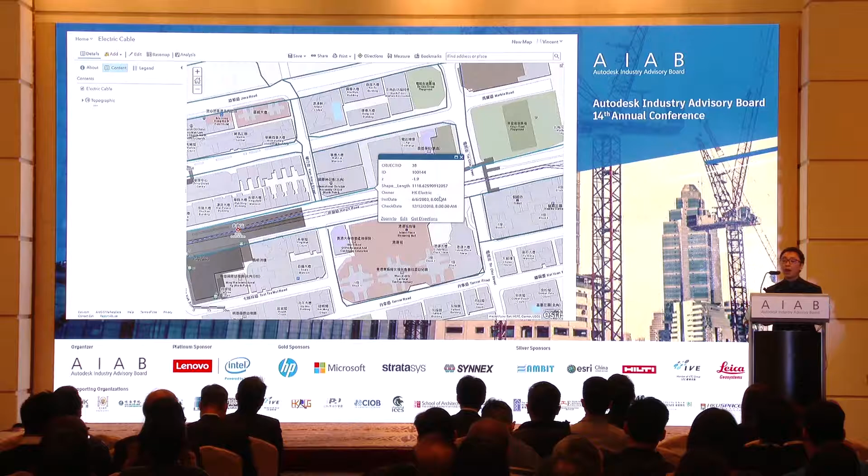So it is very simple GIS operations. It's very easy for all the GIS people, but now not just on the GIS platform. This platform can also be the content provider to your BIM environment. Now, I would like to pass the time to Waiky to demonstrate how to use the BIM environment and access the GIS data for doing their own job.

Okay, thank you, Michael. So our workflow will be like this. We will have everything connected to InfraWorks. We will have the terrain data and aerial photo put into InfraWorks, and then from InfraWorks, we connect to ArcGIS directly to get the underground pipe data, the water area data, the building footprint data, and the subway station data, all put into InfraWorks.

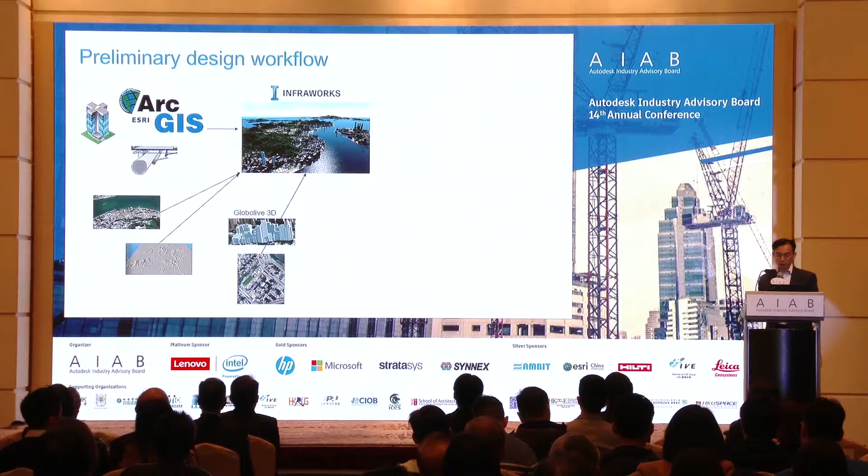And we also make use of some satellite images, and then through an Esri partner called Globolive 3D, an Indian company, we will import some of their buildings into InfraWorks too. And then we will put our ready-made Revit model into InfraWorks. Suppose we make a school on a hillside; we will do the site formation, make a new road and bridge to the school, and because of the road, we will do some road traffic analysis, and then generate a video for public consultation.

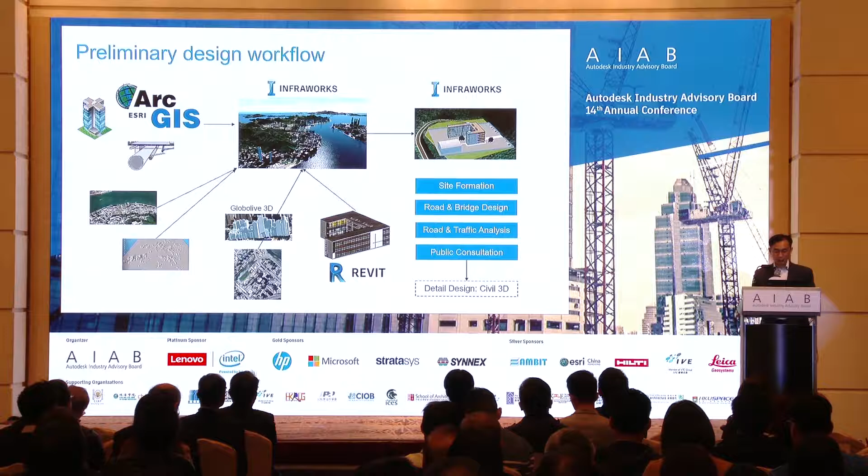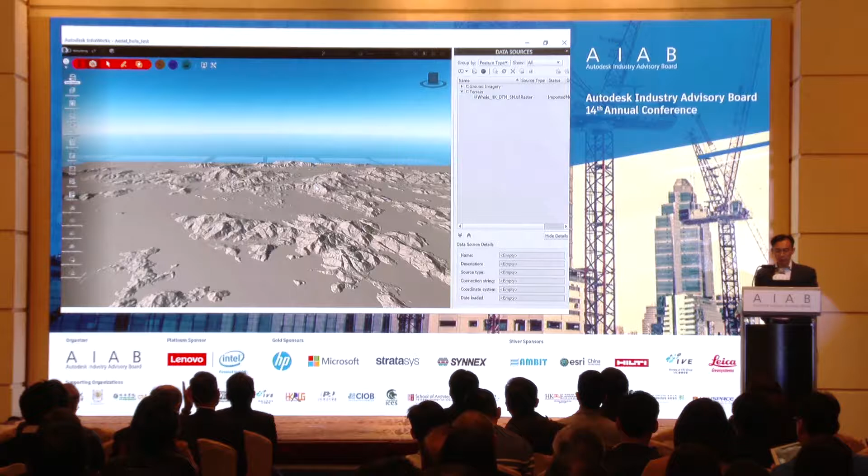And then you can also go through Civil 3D to do detail design on your road or your slope, and then I will pass to Michael again to do the GIS analysis. Okay, so here's the quick demonstration. First of all, we have the InfraWorks environment, we load in the terrain data, and we also load in the aerial photo, and basically you have the whole Hong Kong model in InfraWorks. What we lack is the building, the sea, and the underground data.

So we click an Esri button in InfraWorks, and we have the same location as your InfraWorks model, and then we check in Michael's ready data: the building footprint, underground data, subway station, etc., the water level, and then you have the whole Hong Kong model. And it just runs on a PC with 32 gigabytes of memory. So let's see the model.

So here's the integrated model with the underground water pipe, part of a subway station, and then you have all the buildings there, okay? And the overall whole Hong Kong. Of course, you can also make use of the 3D spatial data from the Lands Department to make this model more beautiful, okay?

So here we pick a site to build our school. We pick a hillside close to the Quarry Bay area. And then we need to do a site formation. So we just pick an area and select the hillside area where we want to build the school. And then we need to make the platform, so we adjust the elevation of the four corners of this coverage.

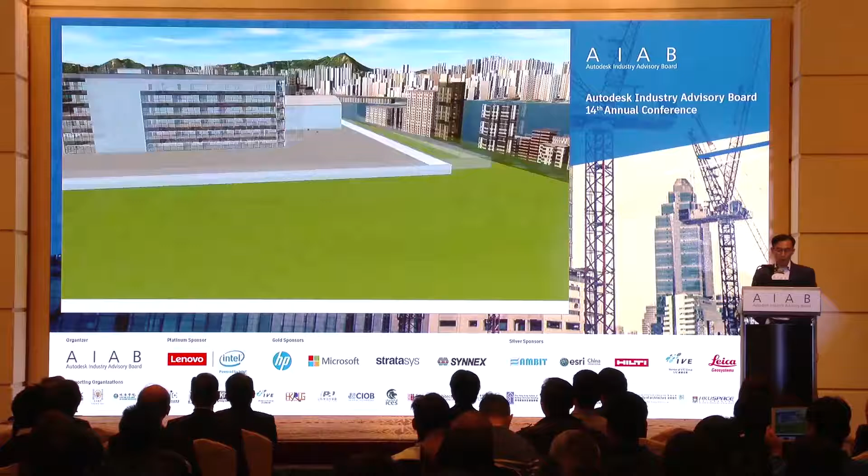Okay, and here you can go through it, and it has some furniture, car parks, everything is already ready. Okay. So we need to build the access road to the site, connecting to the nearby roads. So we build this road and then adjust the elevation. What you see is what you get. Or you can also turn on the profile view to make the road less steep there.

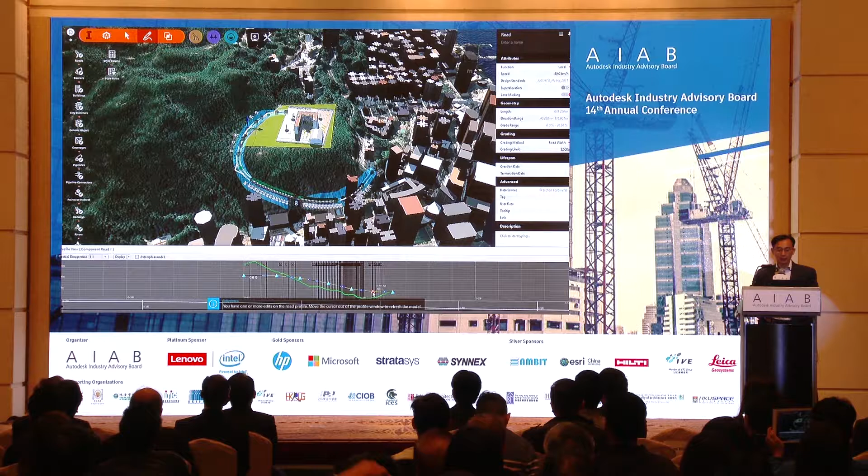Okay. And then I can save this as one of the proposals. And if I don't like the road, I can change part of the road into a bridge, and then you can see the girder there, and also you can adjust the piers and check the space envelope under the bridge. All this can be done by InfraWorks very easily.

And then I can check the cross section of the road, check the super elevation, and also I can check the cut and fill of each cross section to understand our design.

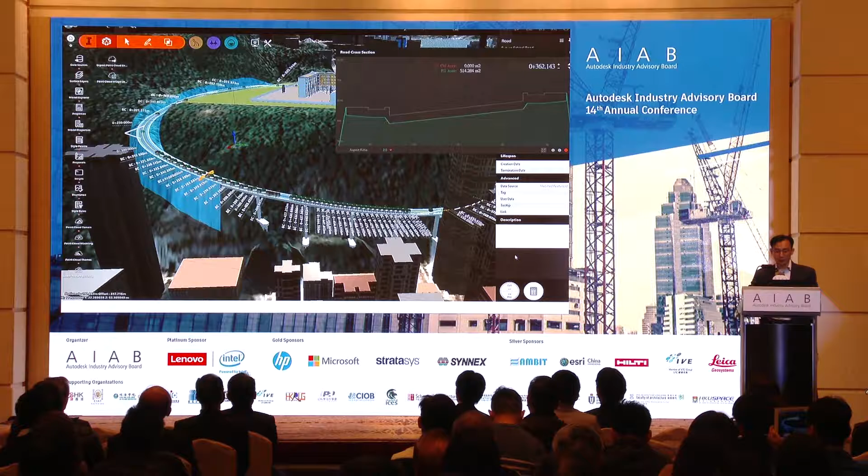Because I have saved the proposal, I can switch to different proposals. I can switch back to our road design without the bridge, or continue with our design on the bridge proposal. And then we can do the sight distance analysis to see whether, when the driver drives on the road, there's any obstacle blocking the eyesight of the driver, to see any potential dangers to the drivers.

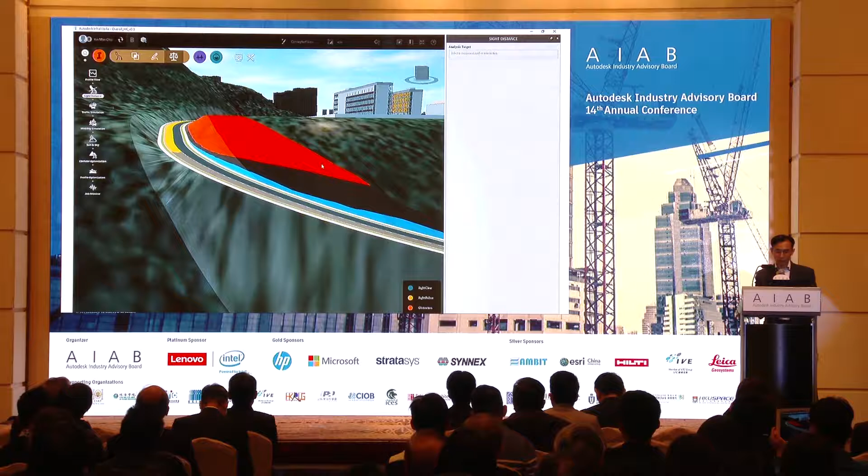And then we can also do the traffic or mobility simulations. You can have the pedestrian, the adult, the child proportion. You can input different kinds of cars, you can specify, and also the traffic data. You can input it based on the assumption, and then you can have the traffic simulation on the site.

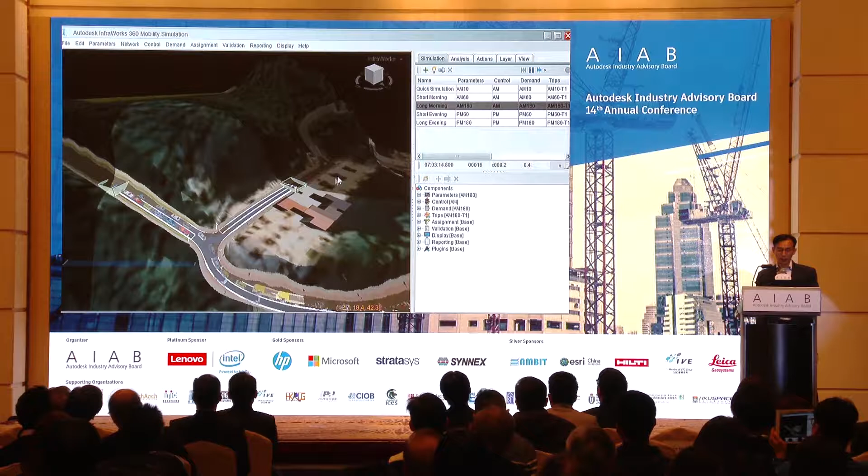And you see in the morning the parents picking up the kids for school, so we have a bit of traffic jam on the road to the school. So we may need to do something here, okay?

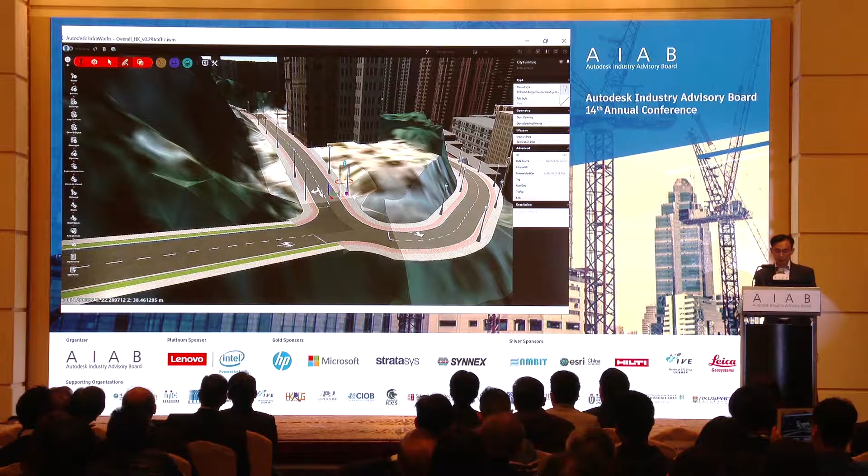And then while we are designing, suppose some surveyor or some people go to the site to verify the data. He can use the Esri data collector to collect, for example, this lamp post's data, its position or its serial number, etc., anything.

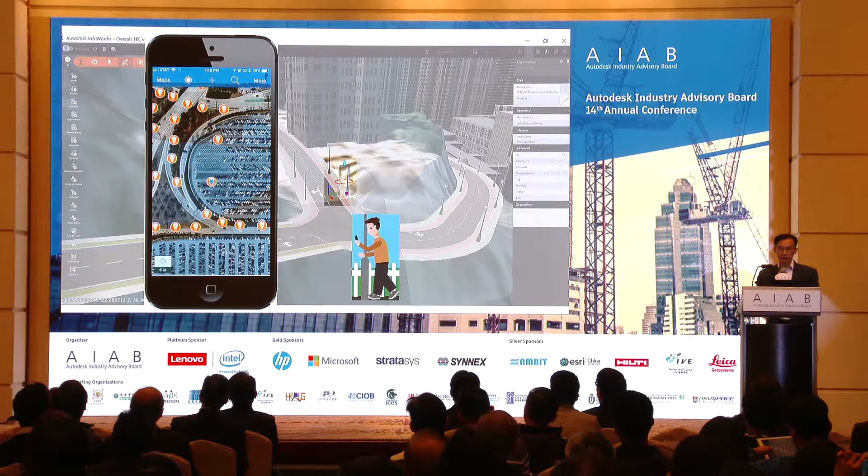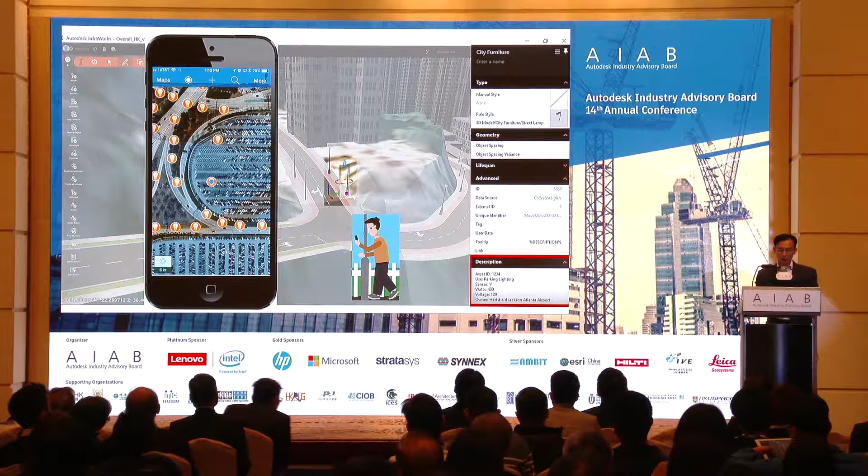And then through this data collector, the information will be instantly transferred to the ArcGIS database. What we can do is, using InfraWorks, just press a synchronize button, and all the information can be synchronized to InfraWorks, so that the engineer, while he's designing everything, can get the most updated information. All the information is real-time updated, and then he can do the best design for us.

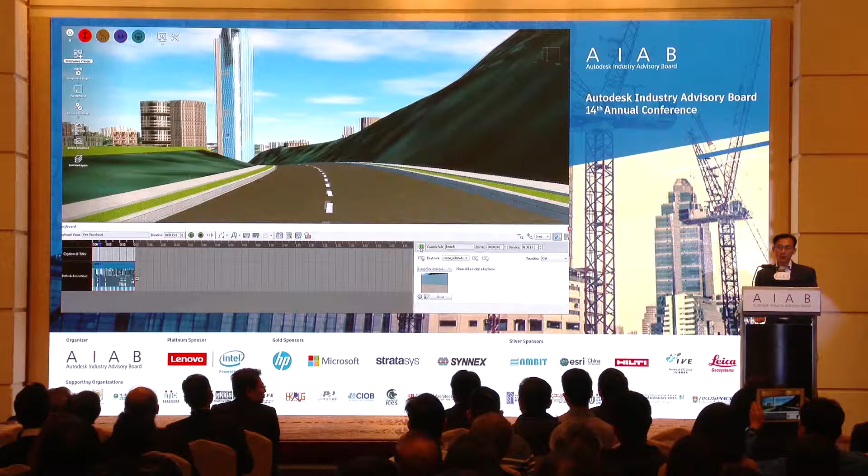On the website or on your phone. Okay, and you can do some teleporting.

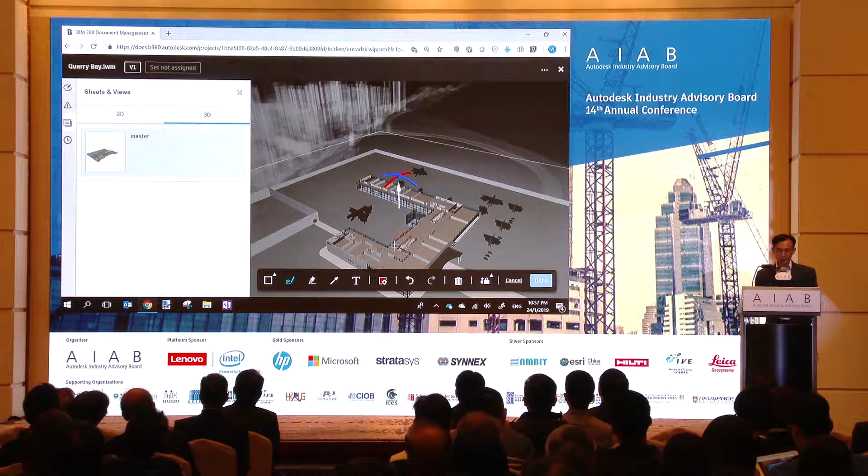And then I can do some markup there.

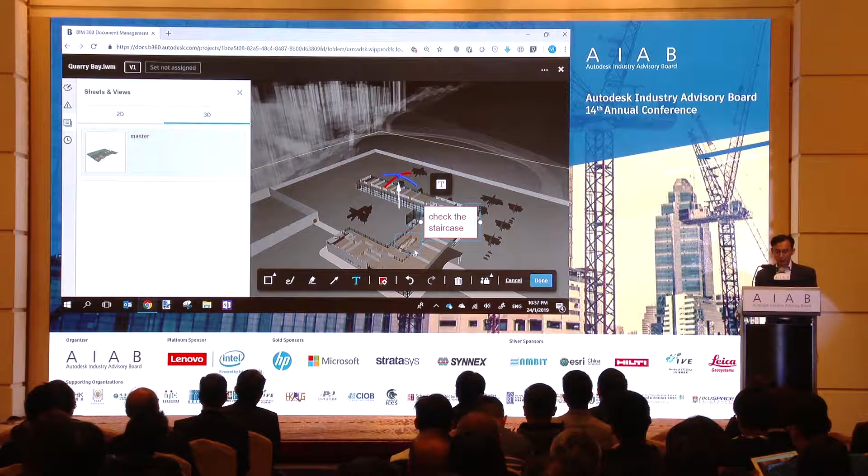And I can also review all the markup I have. There are two markups showing up here. That one is what I marked up last night.

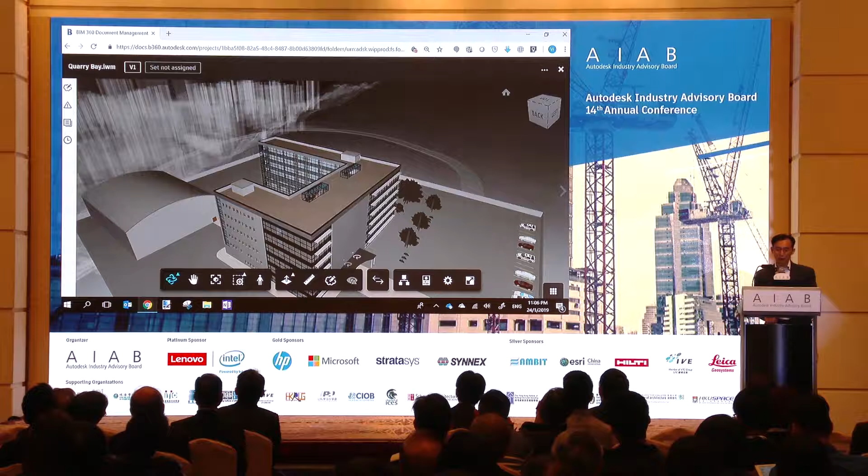And then you can also do some measurement on the model on your phone. Or you can also create an issue for somebody to follow up on the thing. So you will have a lot of workflow on BIM 360.

And after that, suppose we have finished all our design of the school and the site, then I will pass to Michael to do the GIS analysis. Thank you, Michael.

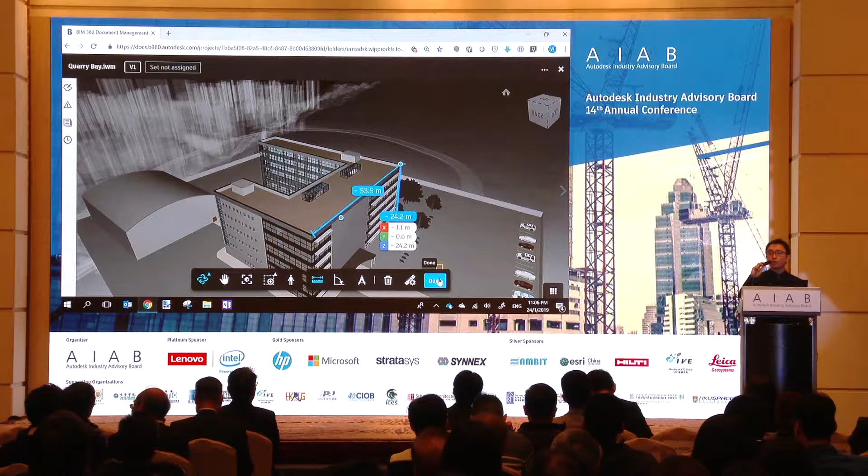Now we go back to see how in ArcGIS we can easily subscribe back to the BIM data provided by Revit. So here is the ArcGIS desktop environment, ArcGIS Pro. Similar to what you see in InfraWorks, we can also integrate different types of spatial 3D data together in a single scene.

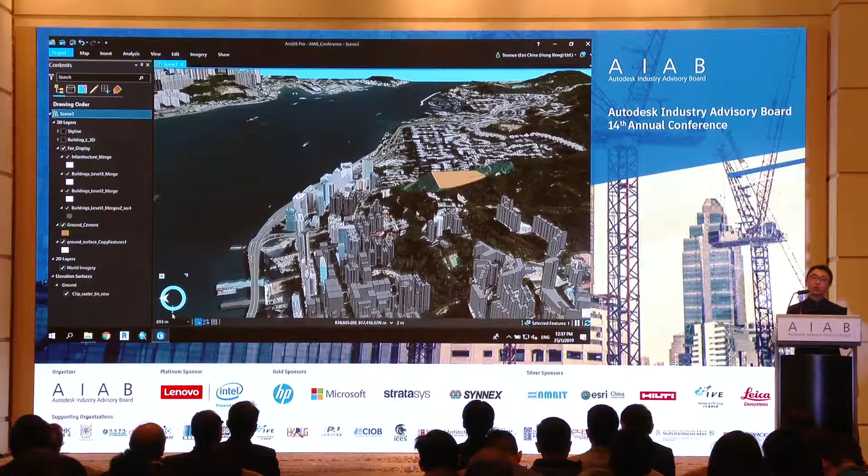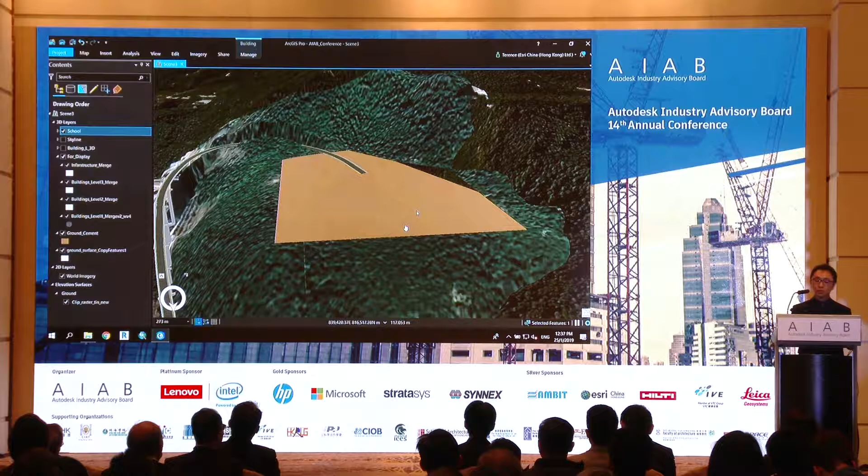What I need to do is directly add the Revit model to ArcGIS Pro. In the past, we needed to go through a conversion process to convert the Revit to GIS data, but now we can simply directly access the Revit model in ArcGIS Pro.

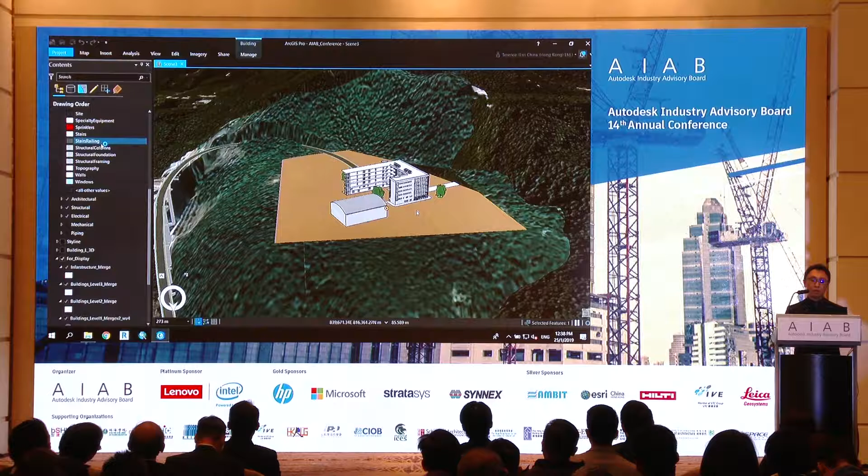Once we add the model, the hierarchies are maintained, like architectural, structural, electrical, mechanical - all the hierarchy in Revit is preserved. You can see how quick and easy it is to put a Revit model in the ArcGIS environment.

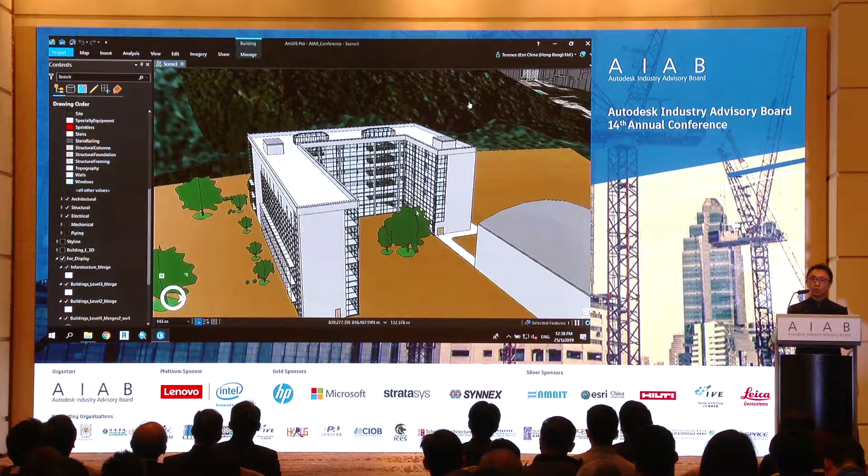Not just the spatial things, but also the corresponding attributes are preserved. You can simply click on it and retrieve all the corresponding attribute data.

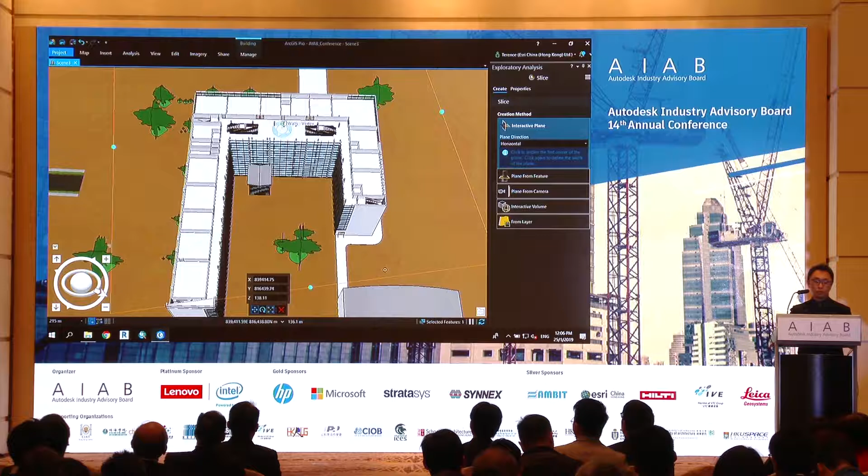Not just viewing the geometry, we can do more on top of it. We can use the slice bar to see the details in different floors. This operation is quite similar to what you did in Infraworks - we also provide a similar thing for you in the GIS environment to conduct that slicing operation.

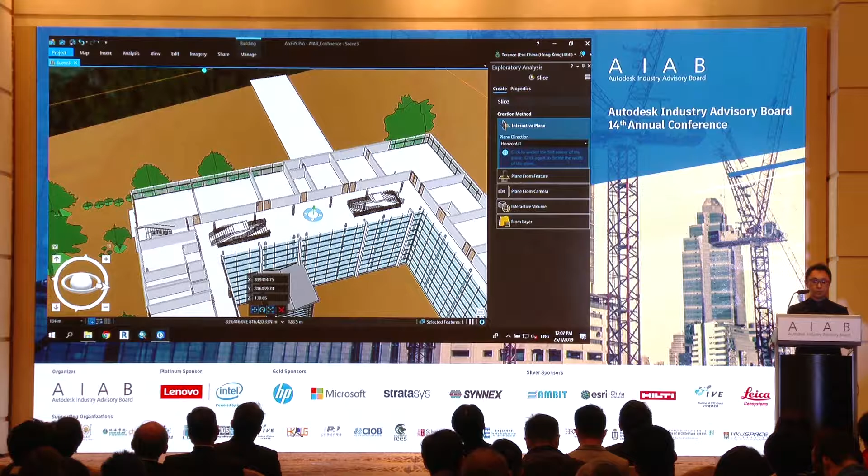So you can see in different perspectives, and then assign the same slicing tools to see the details accessed in individual floors.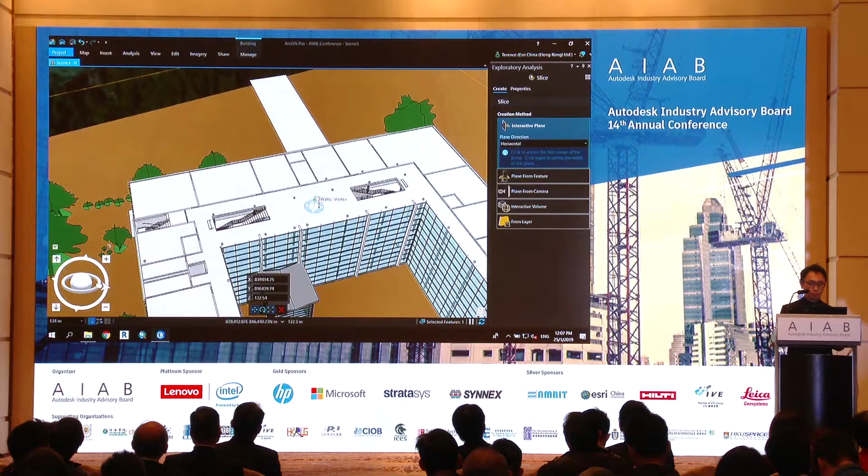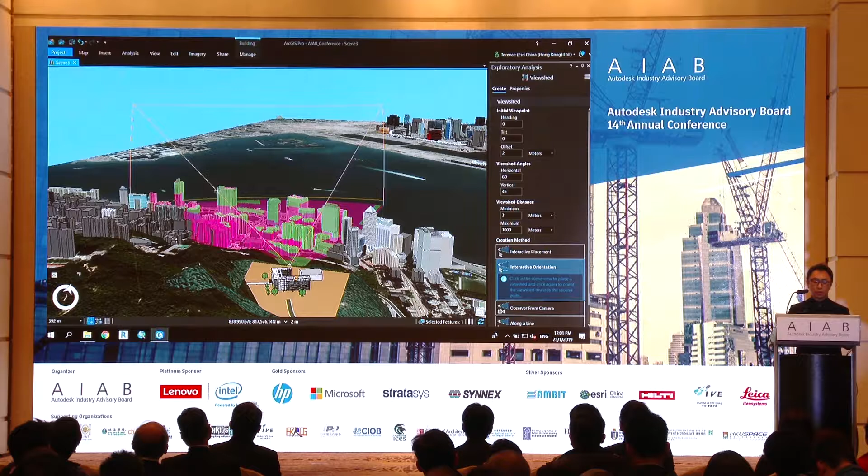Now we are going to do some analysis. For example, I would like to understand the visibility from the proposed school, so I just do some interactive viewshed analysis. Just click on the rooftop and point outside, and I will get an idea what buildings are visible from the school, and which scene will be blocked by existing buildings.

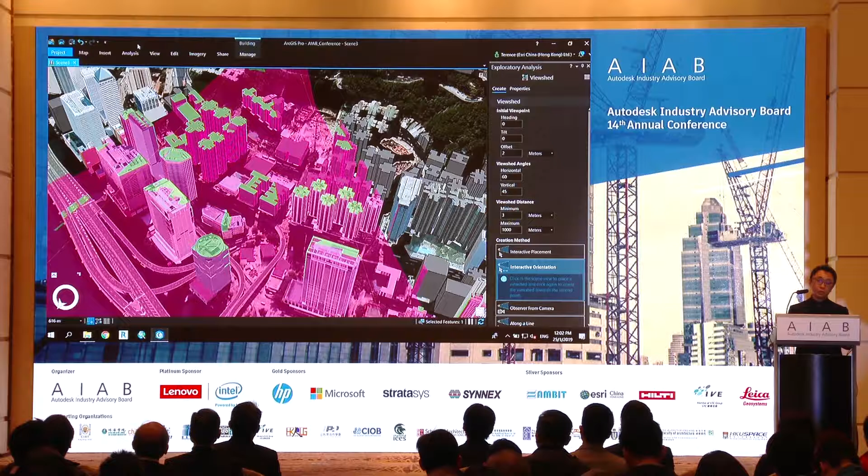So those red areas are invisible, and those green areas are visible.

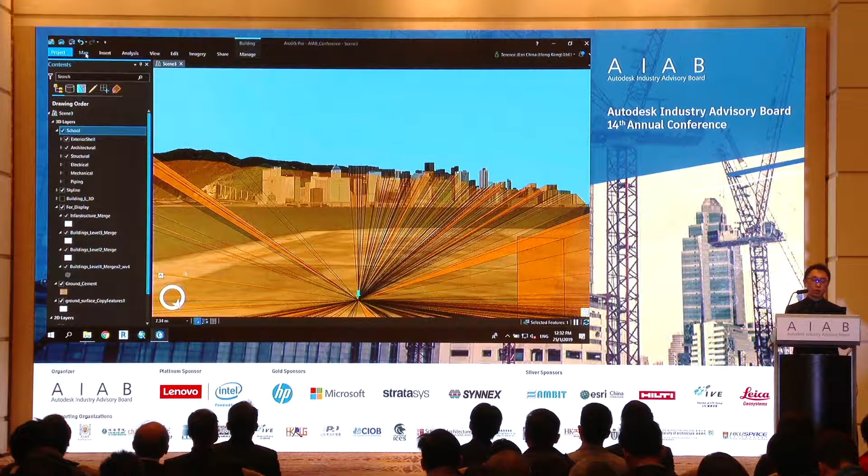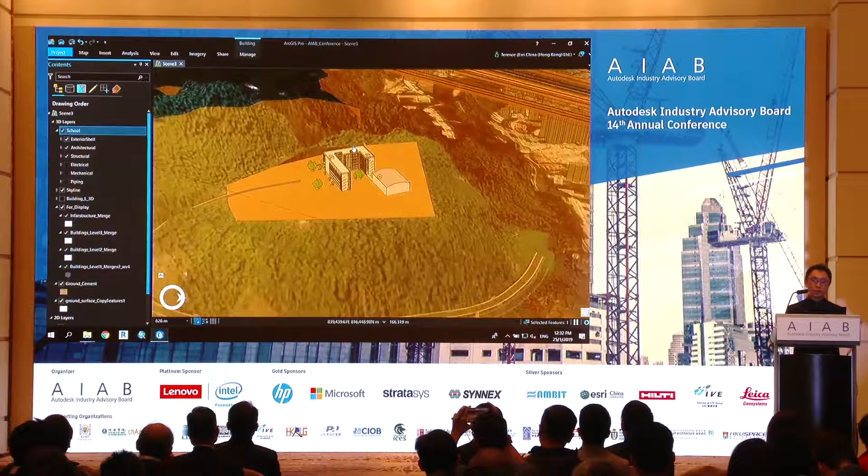Now I would like to do a skyline analysis, because when we're building something new we need to ensure that it doesn't exceed the ridge line. So I put the observer points on the Kai Tak area and then do a skyline analysis. You can see, obviously, the proposed school's height is still below the restricted ridge line, so this is a good proposal.

Not just putting all things in a single GIS dataset - once we finish everything, we can share it, because we would like to enhance collaboration. So simply click on the button and type in the name, and the whole 3D scene can be published to your cloud ArcGIS Online or your private portal.

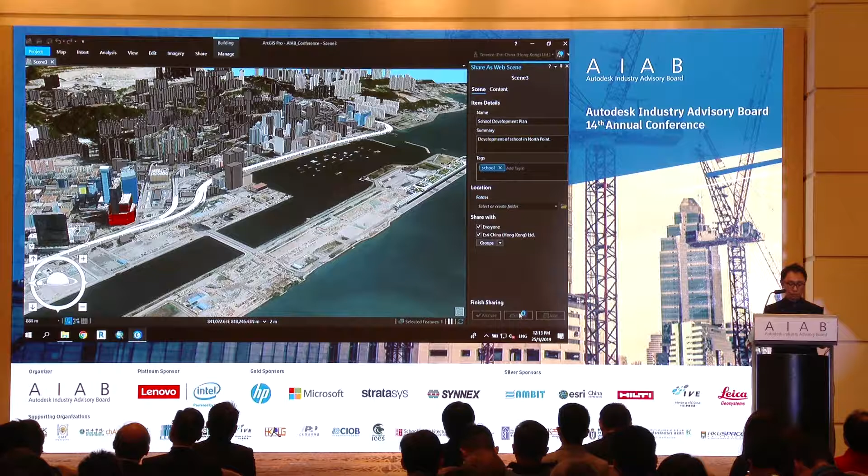Now we go back to the portal, just like in the initial stage, but now we have a 3D model being shared. Simply click on it, and in the web browser, you can view the whole city in 3D.

Now we just keep flying through the city and view it in different perspectives. Let's go to the Kai Tak area, the location where we did the ridgeline analysis on the desktop side. You can see the cruise terminal and all the nice buildings.

Then we can go to the location of the proposed school. Again, the Revit files can be directly published in cloud solutions - no conversion is required.

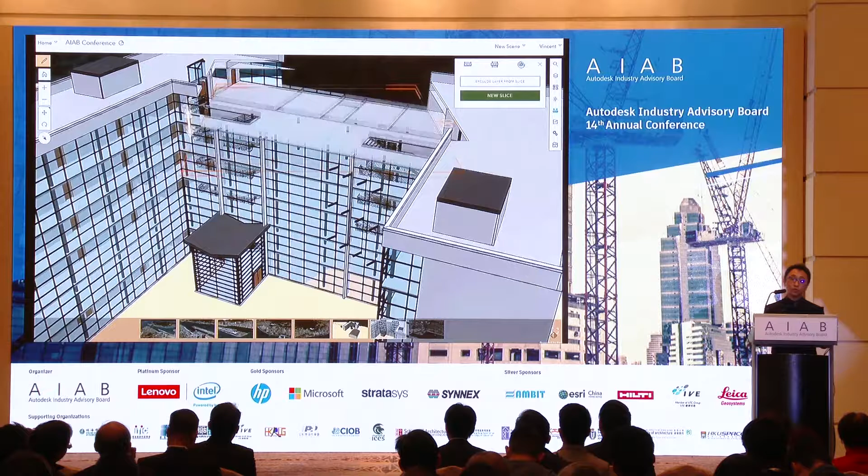On the web, we can do some operations like slicing. Similar to the desktop operations, on the web we can still do slicing to see the details of different floors. Or if I'm interested in particular features, like the doors in this case, I can exclude others and keep the doors appearing. Then I click on it and see all the attributes and features of that asset.

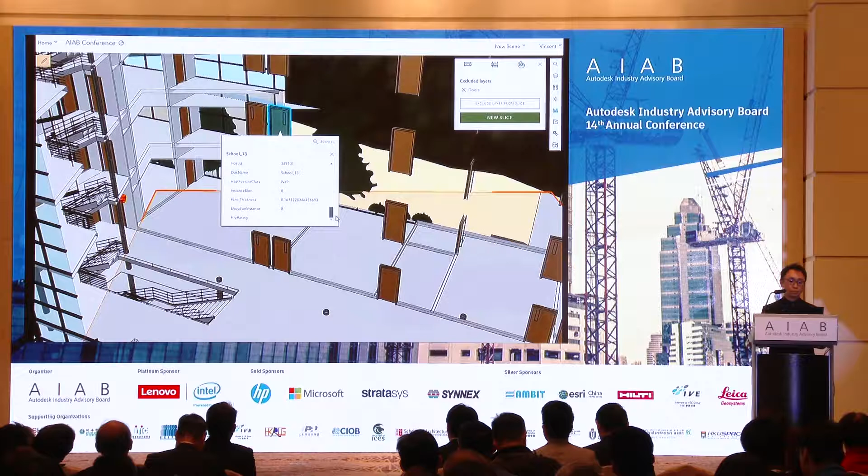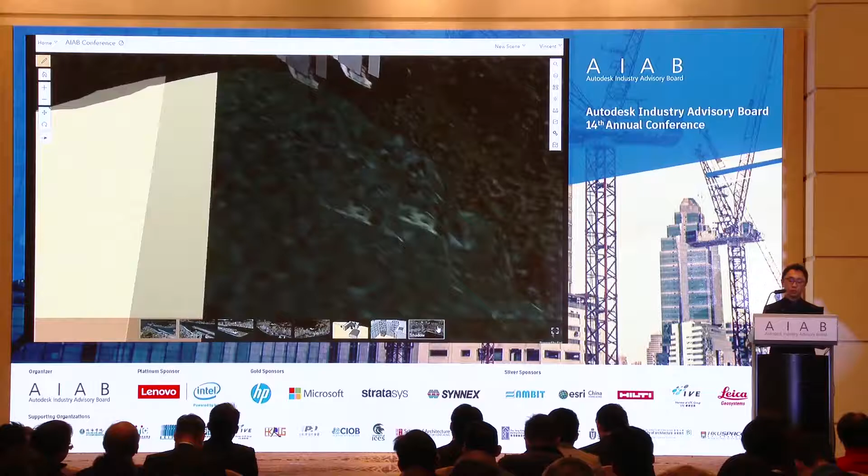So you can see how both the BIM and GIS data can easily be put together and have different types of operations and analysis applied in both environments.

Now, with the alliance between Autodesk and Esri, we hope that we can not just put BIM and GIS together, but with that integrated framework, also integrate other types of data, like IoT. We're talking about maybe applying AI tools to help our society become smarter. With that great cooperation between these two technologies, we hope BIM and GIS can come together more easily and provide a great platform for serving our community in a smarter way, and make our Hong Kong smarter. Thank you.